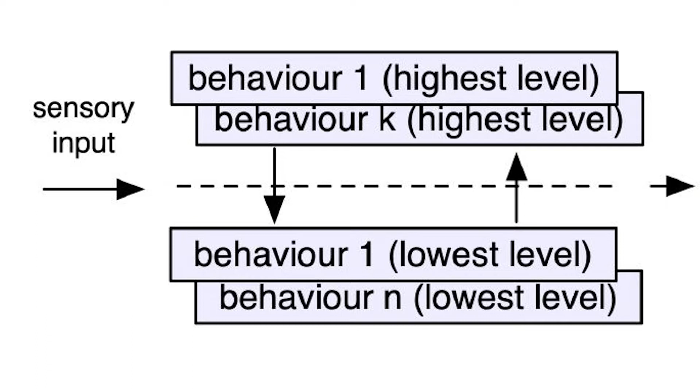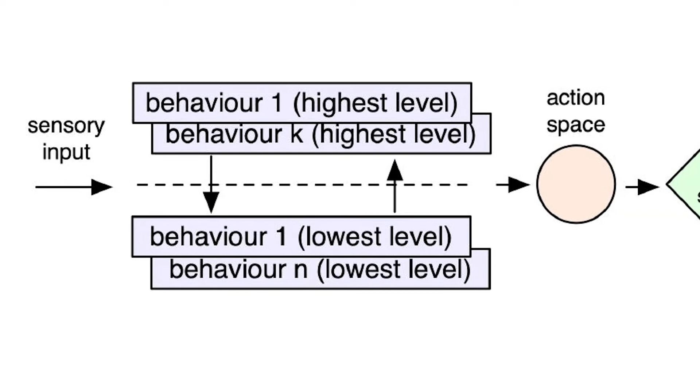These continuously varying affordances then compete together to be activated by the self-driving agent at any one moment. This one action choice of the driving agent is called the emerging behaviour. Since this occurs in real time, this process of producing emergent behaviour or action is very rapid and adaptive.

The technical term for this multi-layered system is subsumption architecture, where higher levels are able to integrate and combine or subsume lower levels. Examples of lower base directive layers are avoid collision, a restriction directive, and exploit affordable space, a proposition directive. Examples of higher levels are lane follow or lane change left.

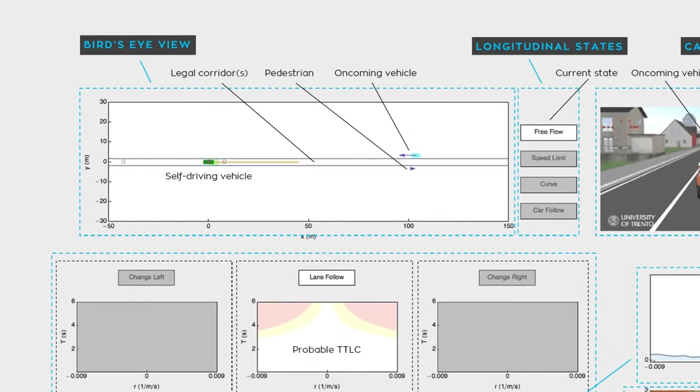This interface represents the multiple directives or affordances acting on the vehicle in real time. This is the bird's eye view, which represents the vehicle, the legal corridor, which is the portion of the road the car is legally allowed to use, and other objects such as the oncoming vehicle and the pedestrian.

On the top right, there is the corresponding camera view showing the whole road. In this example, the legal corridor is the rightmost lane, and the same objects present in the bird's eye view are present here. A panel representing the self-driving agent's longitudinal intention and state is shown top middle. It shows 4 alternative conditions.

Free flow, if the vehicle longitudinal control is not limited by objects, legal speed limits or curves. Car following, when the longitudinal control is constrained by the need to comply with an obstacle ahead, not necessarily a car. Speed limit, when the speed must be adapted to the next legal limit. And curve, when the speed must be reduced for a next curve. The current state is highlighted.

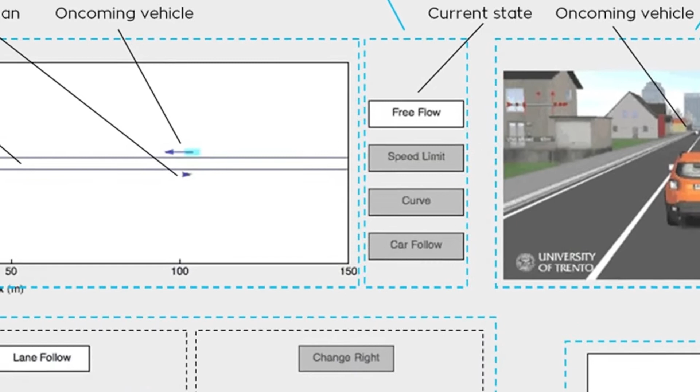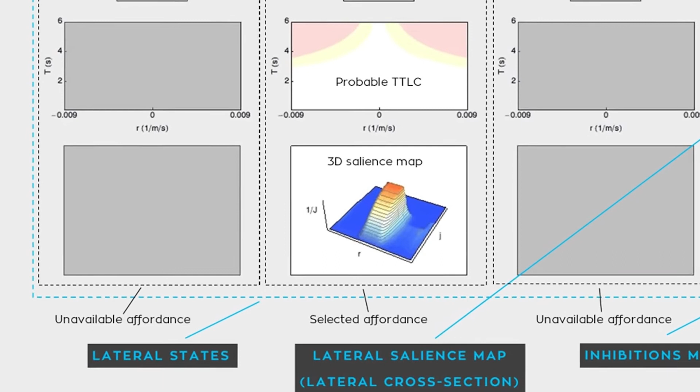At the bottom left, there is a panel representing the lateral state and intention. The panel shows 3 distinct affordances or possible options: remaining on the current legal corridor, or moving to an adjacent corridor left or right. In the example, there are no legal affordable corridors on both sides, hence the squares are grey. If there are multiple affordances, the chosen affordance is highlighted, in this case staying in lane, and the others are dimmed. For every affordable lateral corridor, there are 2 sub-panels.

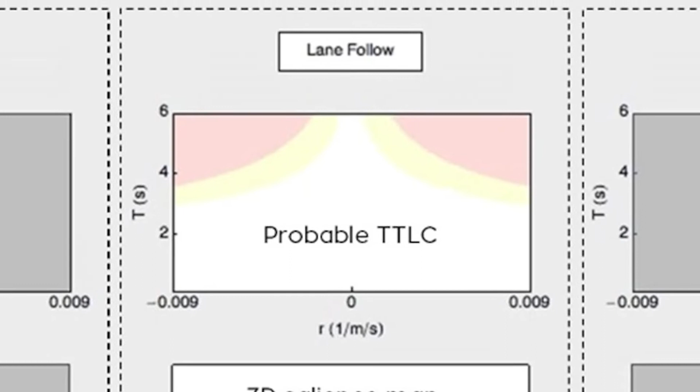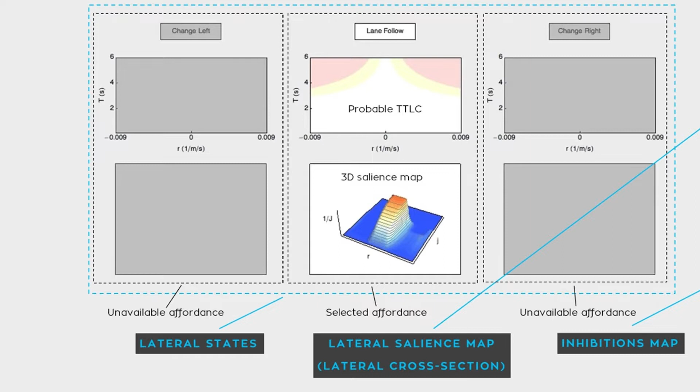The bottom one shows a 3D representation of the salience map. The top one is an intermediate step in the computation of the lateral salience, which is related to the estimated probability of time to lane crossing, given a particular lateral control choice. On the right, there are 2 final panes. In the middle, the lateral salience, which visualizes the range of lateral control for remaining in the corridor. This is the lateral cross-section of the 3D salience map.

At the bottom, a chart shows the inhibitions. Absolute inhibitions are in red and partial in yellow, and they are produced by the obstacles shown in the bird's eye and camera views. The inhibited regions indicate the combination of lateral and longitudinal control at risk of collision. The lateral salience map and the inhibition map are related to the selected directive or affordance highlighted in the lateral state pane. The green-white boundary on the inhibition map visualizes the position of the maximum longitudinal salience.

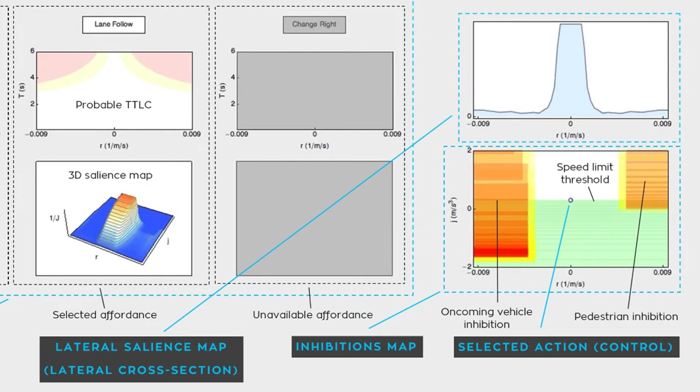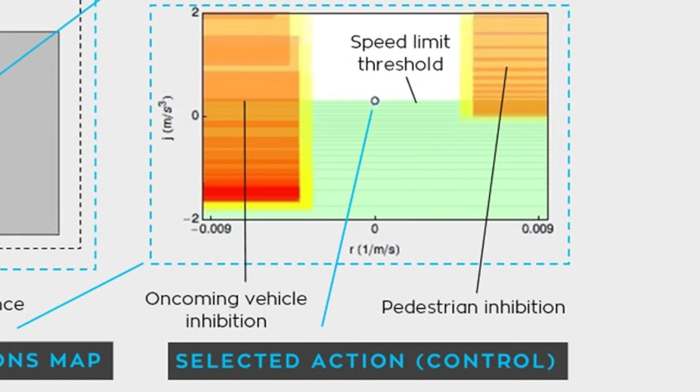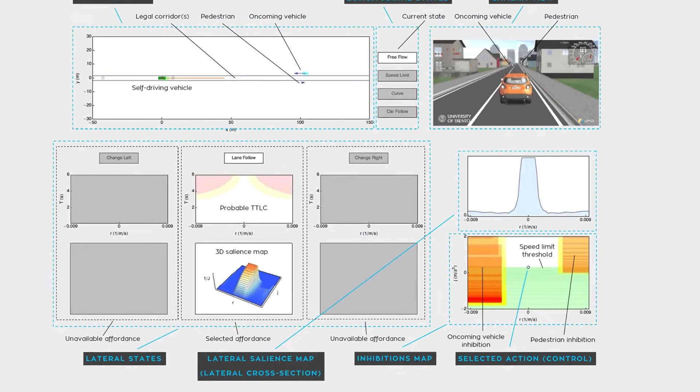A control selection within the green area means the car complies with the speed limit. White means not to comply, but there is no collision. A tiny blue circle indicates the instantaneous longitudinal and lateral control choice selected by the agent. This choice, propagated backward in the lateral and longitudinal state panels, identifies which directive or loop in the multi-layer system or subsumption architecture corresponds to the chosen control, i.e. the agent's longitudinal and lateral intentions. The reactivation of the subsumed loops permits us to reconstruct the emerging behaviour in every detail.

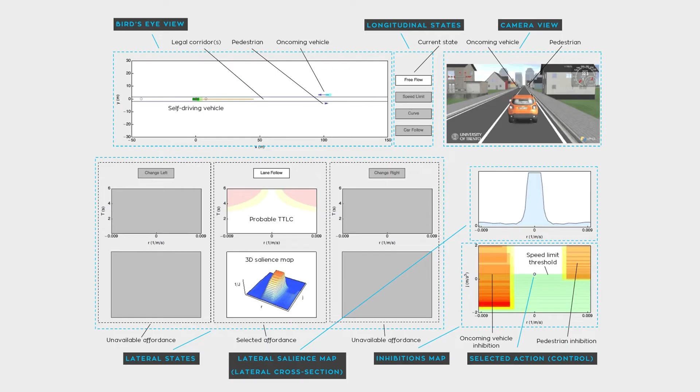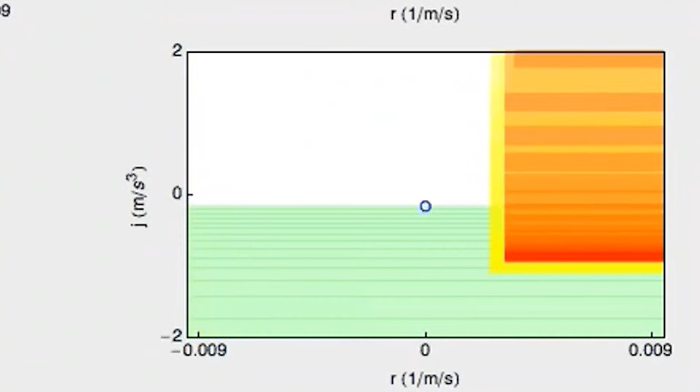An interesting notion related to the inhibition chart is the notion of awareness. Even if the agent chooses the action indicated by the blue circle, the inhibitions corresponding to the obstacles make it aware of them. Even if the agent does not need to choose actions in the red regions, it knows that the actions are prohibited.

Here, two vehicles not shown yet in the camera view are going to collide on the motorway with the self-driving vehicle. They produce inhibitions that approach the action chosen by the agent. The inhibitions of the obstacles overlap the range of lateral control that permits the vehicle to remain in the lane. So the only option for the agent to stay in the lane is choosing a longitudinal control towards the bottom of the chart, which means decelerating.

The selected action is also shown in the 3D salience chart. The chosen longitudinal control is at the bottom edge of the partial inhibition, which automatically produces an emergent car-following behaviour. As the gap opens, the self-driving vehicle resumes speed by approaching the speed limit and merges with the motorway. Notice that when the agent enters the motorway, a left lane becomes available and the corresponding but not selected, i.e. dimmed affordance, appears.

After completing the approach phase, the self-driving vehicle enters the car-following state. Note that the selected action touches the obstacle inhibition and it would not be possible to travel any faster. The two vehicles ahead proceed with the same speed and there is no added value in moving to the left lane. The change left affordance exists, but it is not selected. Note the dimmed colours. Because changing lane would result in the same limit for longitudinal control and therefore there is no gain.

Now the obstacle on the left accelerates. Immediately its inhibition in the control space moves upward and the change left affordance wins. The winner peak is shown in the lateral state panes because switching to the left lane is faster. Hence the agent intentionally switches to the left lane while the longitudinal state remains car following because it is following the left car.

When the lane change is completed, the agent has two options: remaining in the left lane or returning to the right. The latter wins because lanes to the right are slightly biased to favour the legal recommendation to return to the right when possible. The winner peak in the lateral intention pane corresponds to a path that will re-enter the right lane after clearing the obstacle to the right. Note that the intention of returning to the right after completing the overtake is taken very early, well before the right obstacle is cleared.

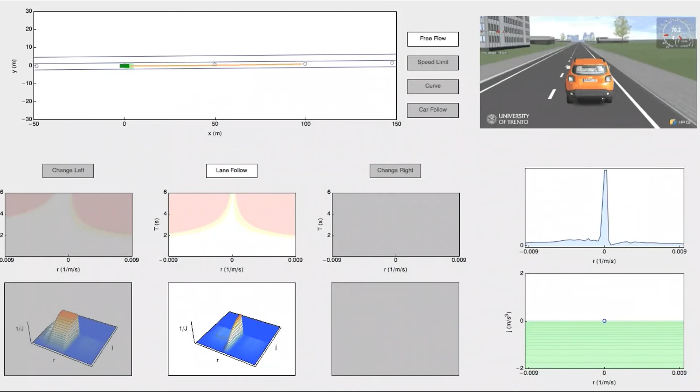A vehicle arriving from the rear in the fast left lane is first detected and it blocks the lane change option. Note that only the trajectories that do not complete the lane switch survive on the salience map on the left pane. Now the fast vehicle frees the left lane. The salience map for left lane change widens, including complete lane change maneuvers. However, the agent does not move leftwards since the current lane it is in is free.

The obstacle decelerates and cuts in front of the self-driving car. The winner action is now the left lane change. As soon as the predicted obstacle path indicates the cut-in, the agent plans to overtake. The overtake maneuver ends with a return to the right lane.

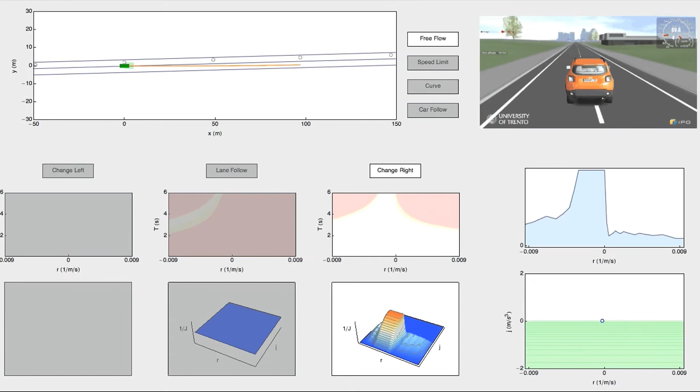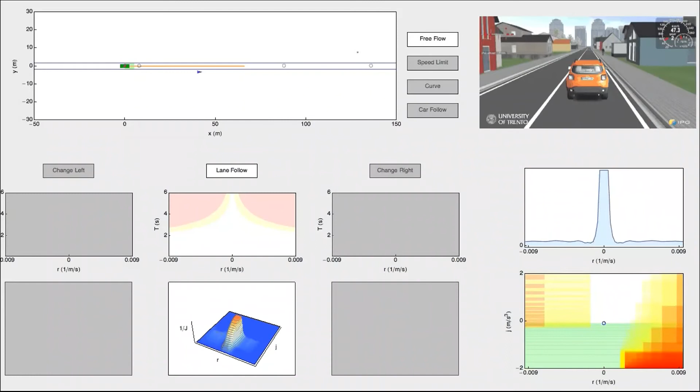Unusual or corner cases may arise from incorrect and unwise behaviour from other road users. Here, the self-driving vehicle stops because of the inhibition produced by the red traffic light. Crossing vehicles produce an additional inhibition to the same road region in front of the self-driving car. When the traffic light turns green and the crossing vehicles stop, the road in front of the self-driving car would become free, permitting the vehicle to start. However, the simultaneous movement of the pedestrian keeps that region prohibited, and the self-driving vehicle does not begin to start regardless of the green traffic light.

Here is another example of a possible corner case. The crossing traffic does not give way. A safe stop manoeuvre emerges from the inhibition caused by the crossing vehicles.

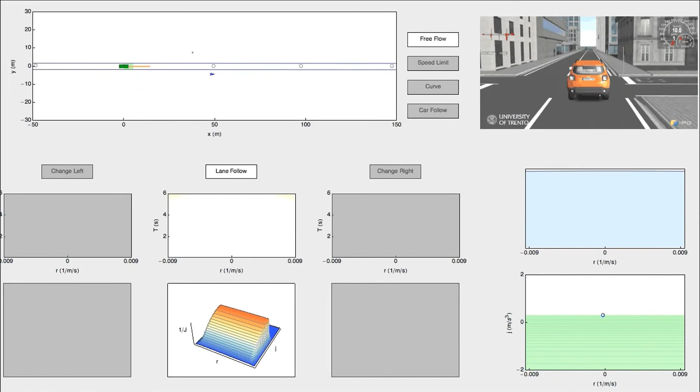This situation combines a few unusual elements. The lane is 25 meters wide. There is a stationary vehicle far ahead in the lane, and there is an abundance of room to pass on either side. Two vehicles follow the self-driving vehicle closely on both sides, at slightly different distances. A traditional self-driving system that we tested would stop the car behind the stationary vehicle because it is a busy lane and it wouldn't consider the unusual width of the lane. Such behaviour is dangerous because other drivers around would not expect that kind of behaviour.

Common sense would suggest letting the nearest rear car on the left pass and then moving on the left to pass the stopped obstacle on the left. And that's the emerging behaviour of the self-driving car. Here, the stopped vehicle ahead is detected. The self-driving vehicle then finds two classes of actions and considers the faster one, corresponding to passing in front of the right car and to the right of the obstacle.

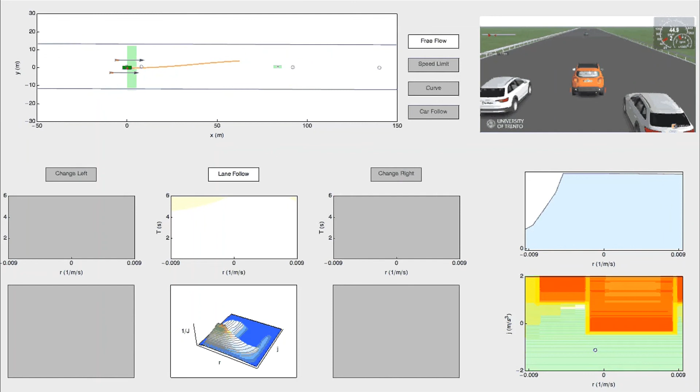However, the car on the right gets closer and closer, and this possibility soon vanishes. The only remaining affordable action is tailing and stopping behind the far obstacle, as the two cars on the sides do not allow lateral movement. Finally, the action of following the car to the left emerges and is chosen.